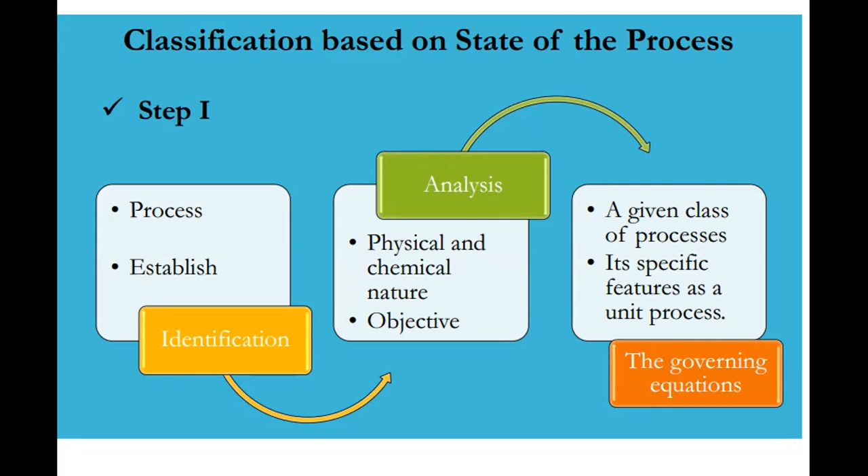These are the steps involved in the mathematical modeling process. The first one is state of the process, and we have seen that for model development, we must deal with three phases: identification, analysis, and the governing equations. This we have discussed. Next...

Classification based on the state of the process, the variables, input and outputs, some parameters will come into picture. As suggested by Devanshu, we discussed control variables and manipulated variables. Which changes with the progress of process is known as control variable, and directly affects what is observed in the process, and can be measured and changed purposefully. So those variables are known as manipulated variables.

Then what do you mean by disturbances? Disturbances are variables that directly affect the course of the process, but cannot be changed purposefully. So it is referred as disturbances. Then intermediate variables are variables related to the course of the process only indirectly. So this is intermediate variables.

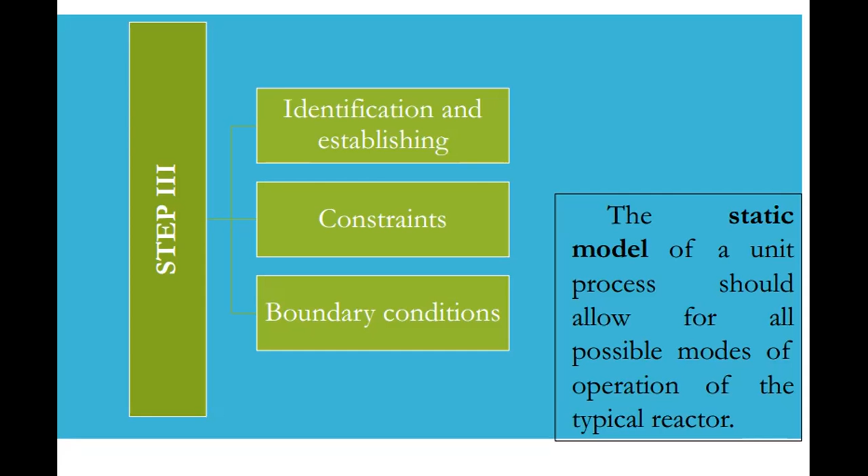The third one which we have discussed, step number 3, is identification and establishing the relationship along with the constraints and boundary conditions. The static model of a unit process should allow for the possible modes of operation of the typical reactor. That is step number 3 which we have discussed.

Let us discuss in terms of dynamic model. What do you mean by dynamic model? I hope you are aware about it right now. Dynamic model is nothing but when the variables or the main variables or the relationship, whatever you have in that particular model, is going to be changed with respect to time. That is known as dynamic model.

You may be aware that dynamic models are somewhat difficult to work upon, or they may be quite difficult as compared to the steady state models, because you have to write d by dt. Something is changing with respect to time, so it represents the dynamic characteristics of the process.

So these dynamic characteristics may be obtained by theoretical approach, by conducting experiments, or by both the processes, right? Either by theory or by the experiment.

And in this process, let's say if you have to obtain dynamic characteristics experimentally, disturbances are applied to the input of the system and the time response to the disturbance is noted. You have to apply the disturbance. What are disturbances? We'll see it once again.

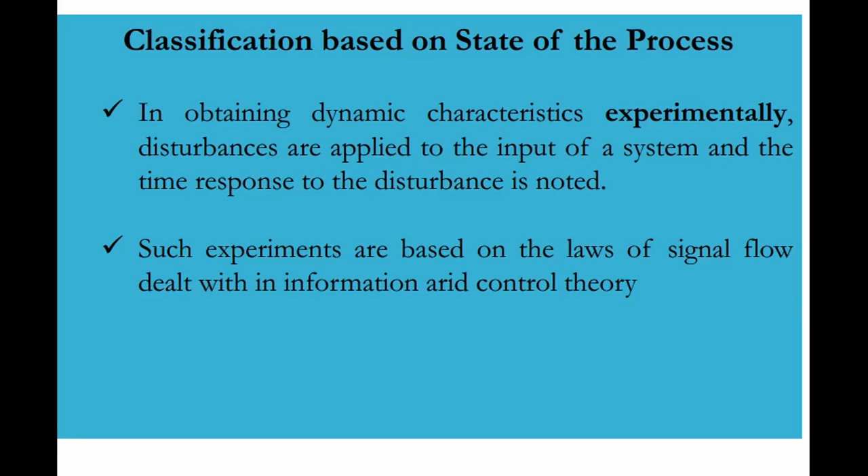This is based on the dynamic characteristics. It depends upon the dynamic characteristics. So dynamic models, you know how to represent them. Let us take a simple example, you might have studied this and you may remember this. Deepak, Devanshu, Kosha, you had studied about the transfer function of a first order system.

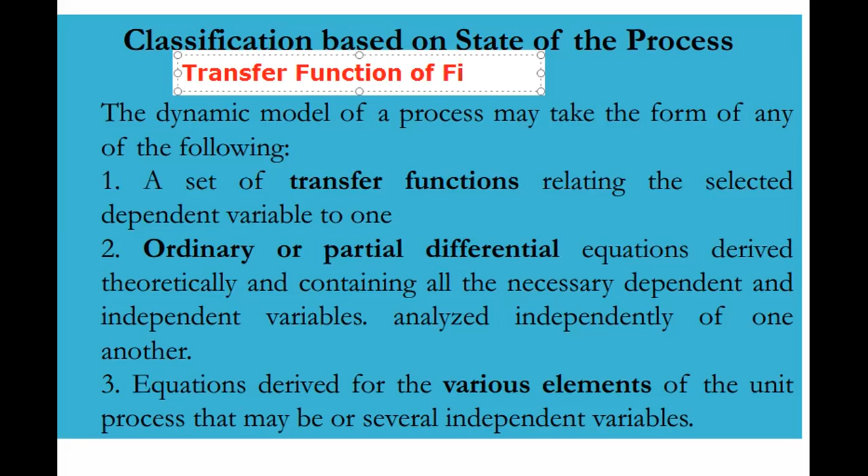Again, process control, you might have studied this. You had developed the equation, the relationship between how a thermometer will change its behavior, right? So this is nothing but the dynamic response or the model developed for this.

We used to write, if I'm not wrong, y of s divided by x of s, that is equals to g of s, is equals to 1 divided by tau s plus 1, something like that. So that is the transfer function.

Transfer function, it is nothing but the ratio of Laplace transform of output function to the input function. Right, we used to write like this.

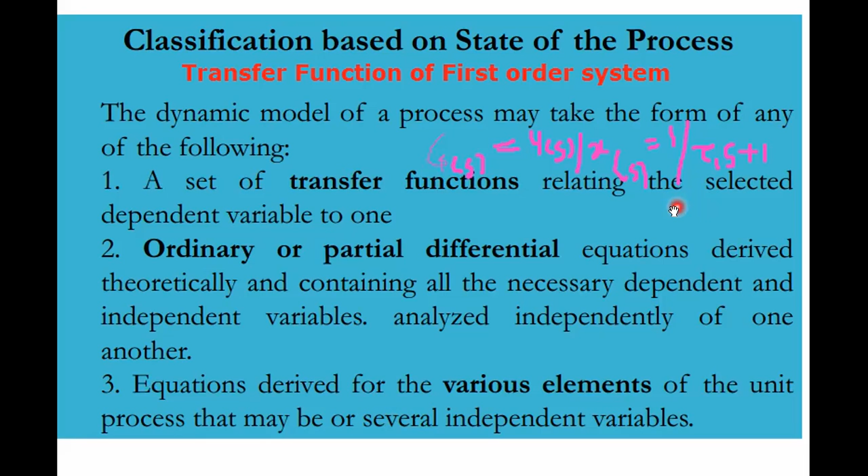So this is the function. Next, equations derived for the various elements of the unit process that may have several independent variables. Here I took in terms of tau 1 s plus 1. Next, you can say tau 1 square s square plus 2 zeta tau s plus 1. So there may be individual components, they may be dependent, they may be independent, and based on that we may take the addition of the remaining several independent variables as well.

Okay, so this is related to the classification based on the state of the process. And the second point here for discussion is dynamic model. And one more subtype, depending upon whether the given process is deterministic or stochastic, they are represented as an analytical rigid model, a numerical rigid model, an analytical probabilistic model, a numerical probabilistic model. Analytical and numerical, rigid and probabilistic, these are the types of classification based on the type of process, right?

So it may be noted that in some practical cases, the model cannot be classified under any of these. So the choice of the particular type of model is to a great extent determined by the simplicity of the solution it offers.

Actually, there are few examples, like let's say if you have to discuss in terms of Newton's method to determine the appropriate minimum or maximum value. You might have studied about this. This is given like this.

X n plus 1 is equals to, if I'm not wrong, f of x minus f dash of x. Please correct me if I'm wrong, I may be wrong here. F double dash of x.

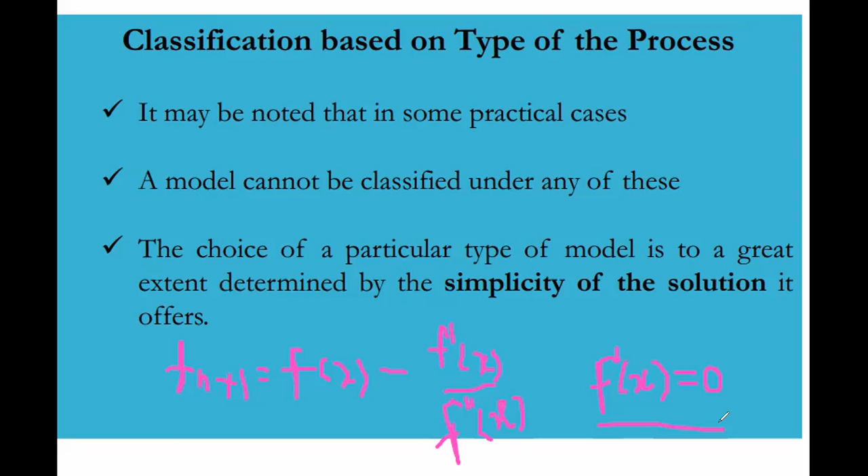It shows how it will be good. Okay, so all these things are here. So sometimes, by general representation or by just looking at the method, how it is simple, we will be able to identify the process. Okay, is this clear? I hope you might be aware about this, but once again, we have to go through this.

So what do you mean by rigid or deterministic models? These models usually describe deterministic processes without the use of probabilistic distribution. You are not going for the probability.

The subclassification of rigid or deterministic models includes analytical rigid models, as we have seen in the earlier slide, and numerical rigid models. It depends upon whether the solution is obtained analytically or numerically for that particular process. So this is the discussion about rigid and deterministic models.

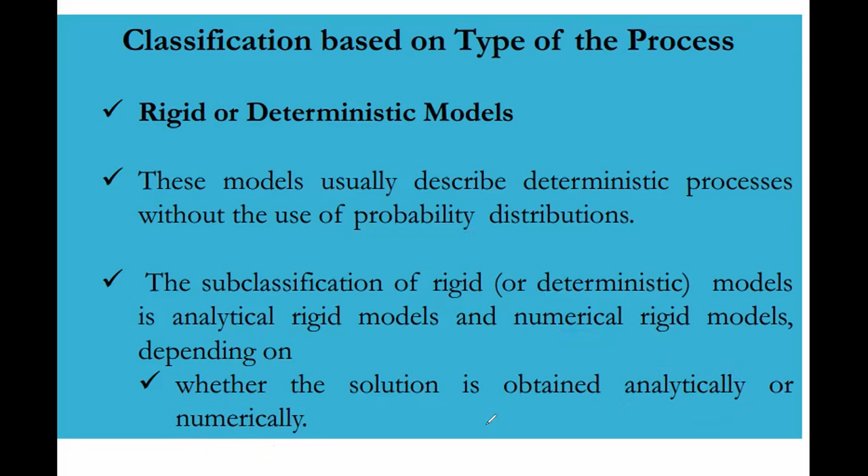Sometimes there may be underlying phenomena. If we are discussing statistical models and statistical parameters, sometimes those parameters may not contribute as per requirement. Sometimes performance is overperformed, sometimes underperformed, but we want exact values. So what you have to do at that time is take the average. The distribution is not that important there, and you have to deal with the average.

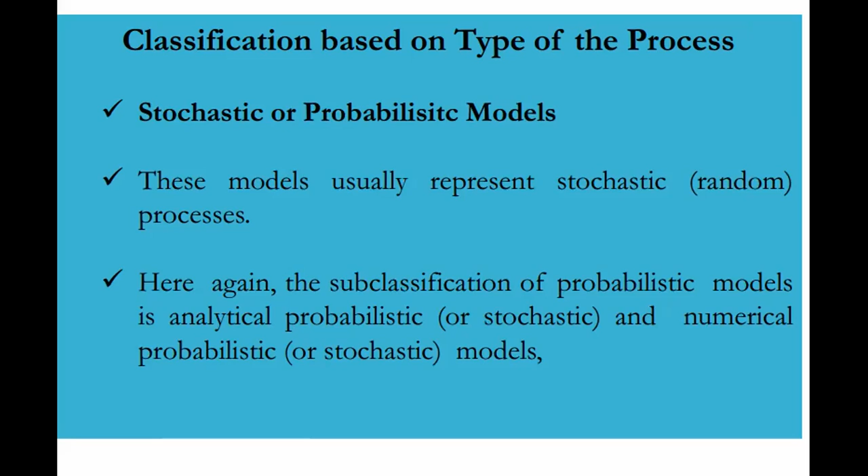So let us discuss the stochastic or probabilistic model, where stochastic means random. There is subclassification once again: probabilistic model is analytical probabilistic and numerical probabilistic, depending upon whether the solution is obtained analytically or numerically. Simulation corresponding to the numerical stochastic model is known as Monte Carlo simulation. Please remember this about Monte Carlo simulation. If you are interested, you may go through what exactly Monte Carlo simulations are.

This is one of the topics where we can contribute to the system in order to study the behavior of the system, how the parameters are changing. Monte Carlo simulation is very famous, and if you are interested, let us explore it.

Let us compare rigid and stochastic models. In construction of rigid models, different classical techniques of mathematics are used, like differential equations, integral equations, linear differential equations, and operators for conversion to algebraic models and so on. In probabilistic models, distribution of discrete and continuous variables and also sample distributions can be considered. The advantage of statistical models over the rigid, analytical one is that they do not call for rough approximation and allow for a greater number of factors.

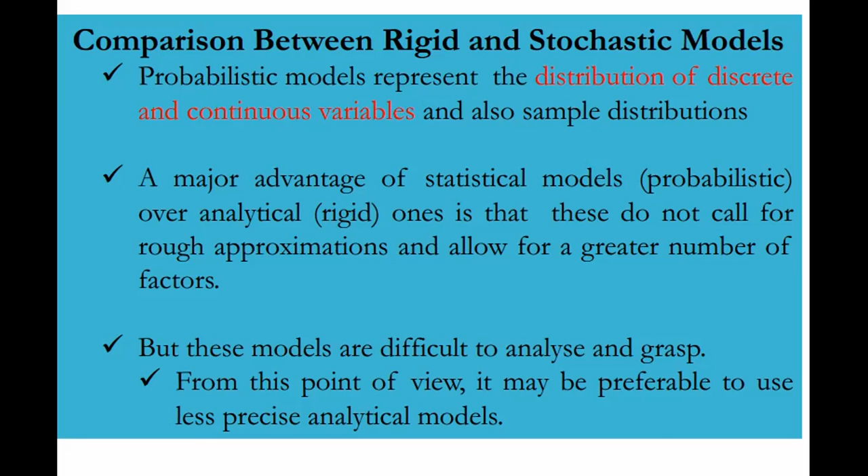Sometimes these models are very difficult to analyze and grasp, so it provides less precise values. Actually, it provides accurate results, but due to its complexity, one may prefer to use less precise analytical models.

Next we have to discuss boundary conditions, what exactly the boundary conditions are. Let us discuss about it.

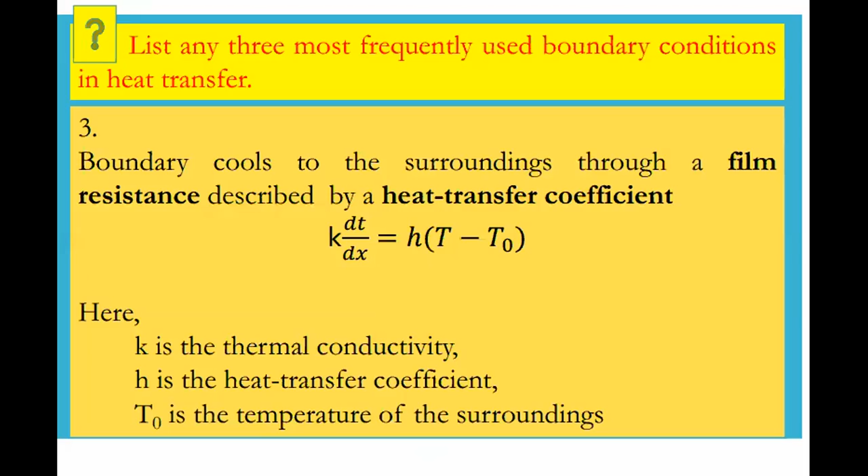Do you have any doubt up to this point? Any doubt, any suggestion? Please let me know. No doubt, no suggestion, okay.

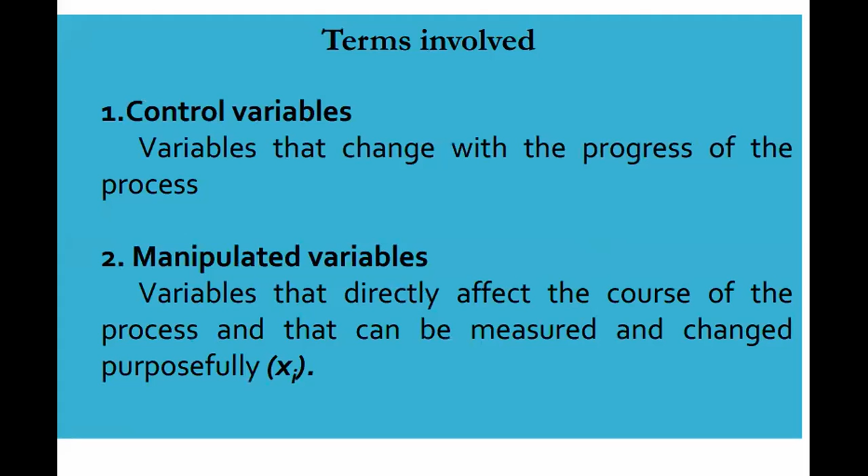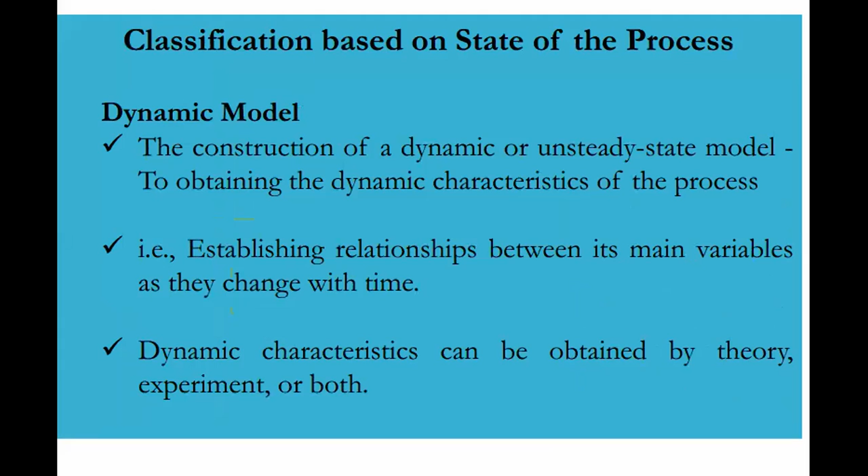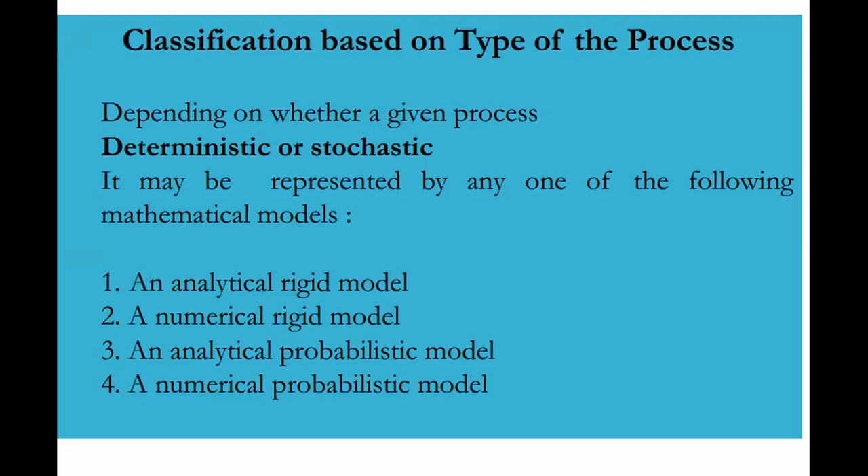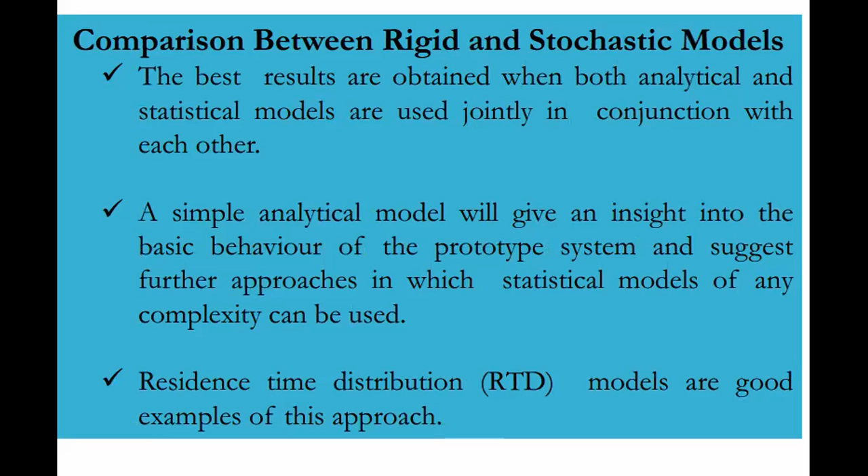So just to summarize what we have discussed: the terms involved here like control variable, manipulated variable, disturbances, intermediate variables, then steady state modeling. Then we discussed dynamic model, the idea behind the transfer function, ordinary differential equations, the subtypes of deterministic and stochastic processes, and the classification. We also discussed what Monte Carlo simulation is, how it is constructed, where it is constructed, its advantages, how it is compared, and different examples.

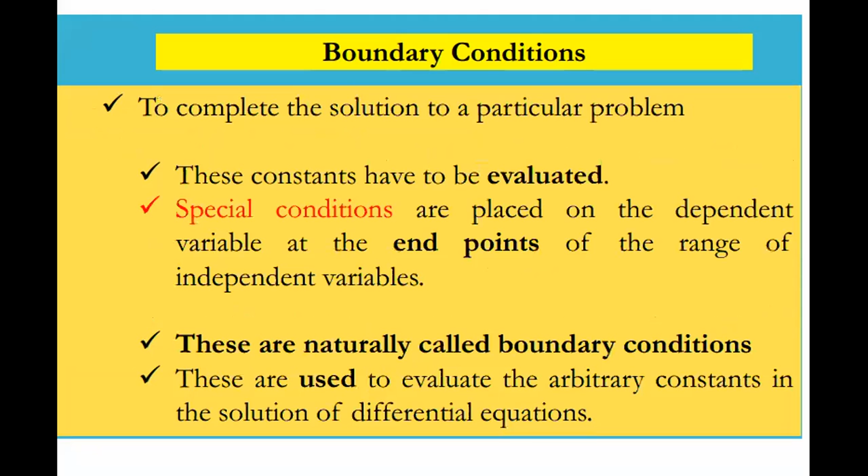And then we discussed boundary conditions as well - what is the general solution for it. You can solve it to get the number of constants here, then it is evaluated to get the arbitrary values. This is the general solution, with arbitrary constants, a number of constants, and special conditions that are referred to as boundary conditions.

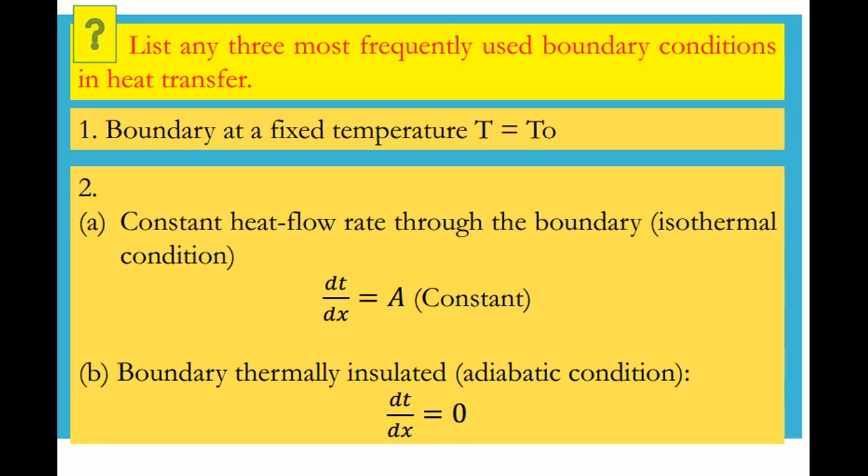So this is what we have discussed, and what do you mean by initial condition - that we have discussed. And at the end, we discussed the most frequently used boundary conditions in heat transfer as well.

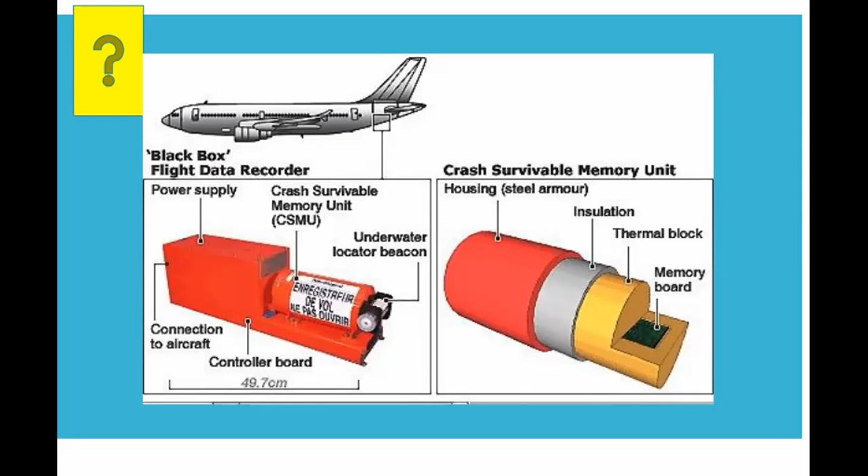Actually, I thought to ask this to you, Devanshu itself - did you get your result? I don't know, they may be looking for it. Soon you will get it. If I'm not wrong, I will ask the head of department and I will let you know. Because that is to be decided by the examination section.